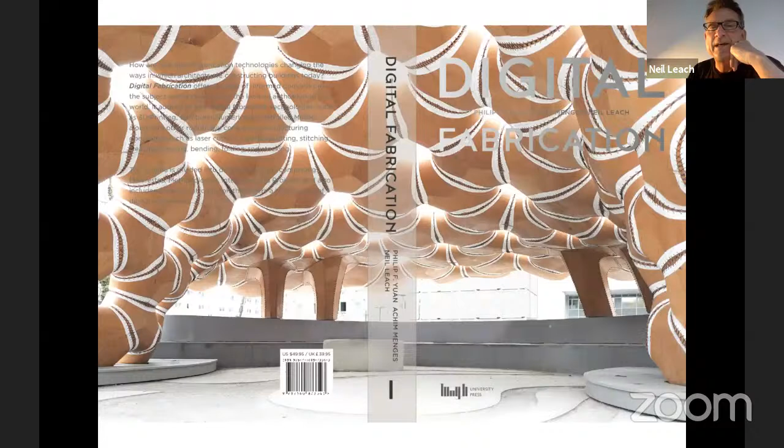Materials are analog, and you could argue that the whole way in which we put together buildings is that the digital remains a kind of a form of modeling. Buildings themselves are not digital, buildings are analog, but we use digital means to control the production of these things. And this is a comment by Neil Gershenfeld, where he kind of makes the point clear that what we're dealing with here is cutting, grinding, and so on, very much analog processes that are controlled by the digital. So the term CNC, computer numerically controlled, is really the term that is very useful to understand precisely what is going on.

So in terms of AI then, this is the work of AI Build. It's not as though AI is constructing it. AI is being used in this case to control the nozzle in the 3D printing process. So I guess we should have called that book maybe robotic fabrication rather than digital fabrication, or rather digitally controlled fabrication.

So I want to go back just to contextualize some of these ideas within history, and particularly to the publication Digital Tectonics, which I think is quite crucial in the context of today's debates. Back at the turn of the millennium, in 1999, I was teaching at Columbia in New York, where there was an interesting kind of debate going on between the very progressive computational guys like Karl Chu, Greg Lynn, and so on, and maybe the slightly more conservative historical figures such as Kenneth Frampton.

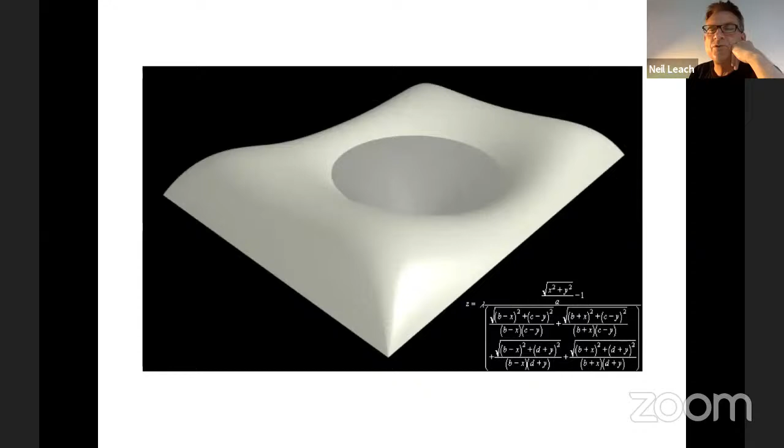And the second technique was, as it were, to massage this form on the computer using a technique called dynamic relaxation, which was pioneered by another colleague of ours at Bath at the time, Mike Barnes. So if you were to look at the ridges that appear in the mullions in this roof, when you apply this technique, it smooths them out. So you go from this to that.

So using these two techniques, they were able to create what effectively was a kind of lid that would literally sit on that roof without creating any lateral thrust. And you can see by the nature of these vertical stanchions that it was literally sitting like a lid.

Parallel to this particular project, there were other forms of research going on. This was a very early form of structural software called eifForm that unfortunately hasn't been marketed, but this was developed by Kristina Shea, who was teaching at the AA at the time, a lecturer at the University of Cambridge. She's since gone on to, I think, ETH Zurich. And this was a form of stochastic non-monotonic simulated annealing. Annealing is the process whereby you cool steel down in a controlled fashion so as to increase the strength.

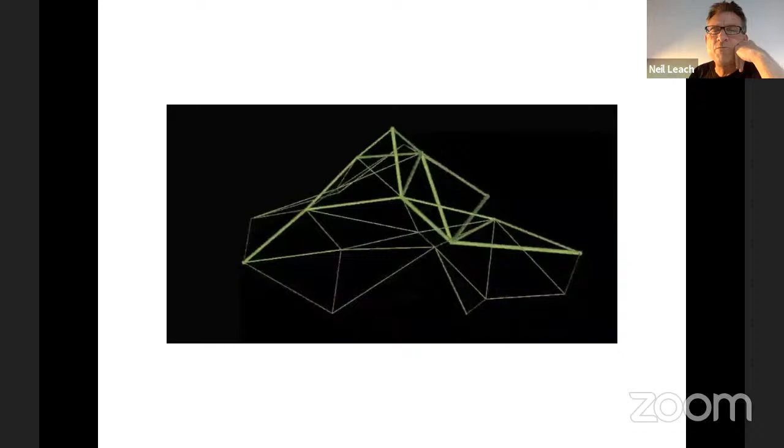And the stochastic non-monotonic side was about trying to open up. So each time a different version came out. These things would take about 20 minutes to run, and you'd have a range of different outcomes. You then would choose between your outcomes.

And this was the first built version of this, a collaboration, which I mentioned before, in Amsterdam, between myself, Špela Videčnik, Kristina Shea, and a few colleagues, where we built this for the first time. At the time it was revolutionary. I mean, this is what, 2002? Things have changed a lot since then, but this was pioneering work in many ways.

This is not really a session on philosophy as such, but the crucial figure in this particular conference was Manuel DeLanda, who has espoused this theory of what he calls new materialism. I like to think of it, and I'm not sure he would agree, in terms of rethinking Marx's famous dictum: up until now, philosophers interpreted the world, the point is to change it. In order to change that world, we have to understand the material conditions in which the world is operating.

And DeLanda famously produced a series of books. This was a hugely inspirational book for me personally, A Thousand Years of Nonlinear History, where he takes this approach and applies it to the way that cities are developed over time. A truly astonishing and revolutionary book, to my mind far more significant than Learning from Las Vegas.

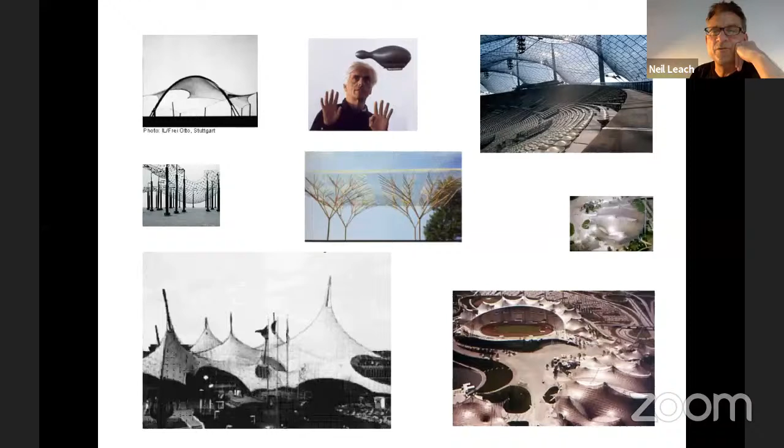And of course, these days we also have this kind of ethical imperative to be more efficient with our own buildings. Since Patrick is also here, maybe just mention briefly some of the research work that's been going on, which I think also fits very much within this particular way of thinking, and illustrates that there is a whole trajectory throughout architectural culture and architectural history that has been exploring the possibility of the intelligent use of materials, especially in structural forms such as this.

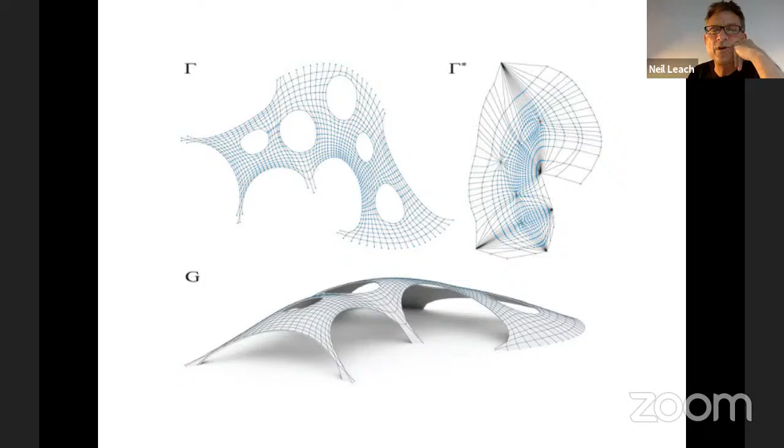And to my mind, at the time when I wrote this, there was nothing that one could do computationally to simulate the complexity of a simple soap bubble. And finally, we can now see another generation of this coming through in the work of Philippe Block with his RhinoVAULT, where he uses software to understand material behavior and avoid stress as much as possible to produce these extraordinary structures. This is from the Venice Biennale, where the ratio of the thickness of this vault is similar to that of an egg, extraordinary in its own way.

And then some 3D printed slabs that he has also worked on. This one is highly reminiscent of the kind of work that was coming out in Cambridge around 1450, King's College Chapel, the fan vaulting there, and so on.

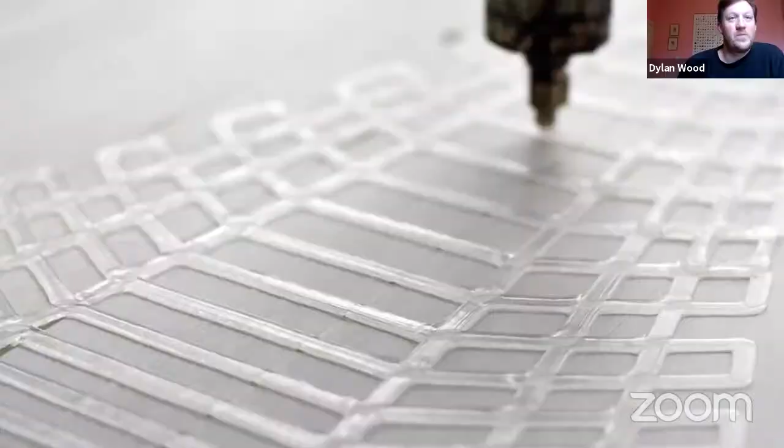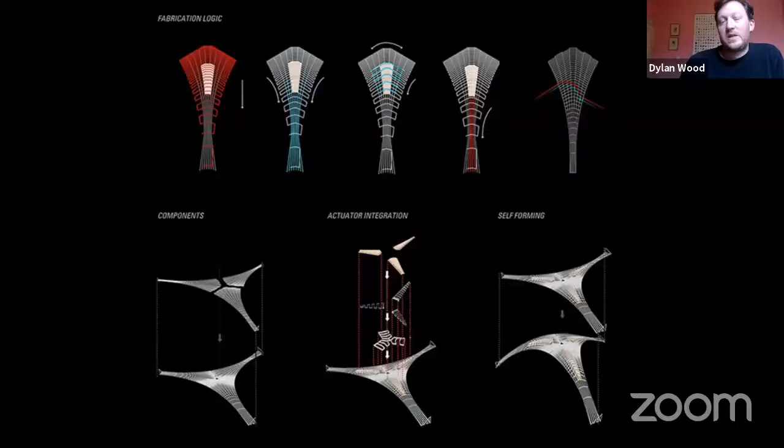So I just wanted to first say that it's really nice to be back in this context after Tiffany and I, already in 2018, did this workshop, which we also called Material Intelligence, at the Digital Futures conference, where we were looking at how we could program different levels of compliance into 3D printed structures. That was quite fun, and as always in Shanghai, motivating in terms of effort and spirit. And this work has also persisted and continues in our group even today.

Just one thing. There's a slight interference there. I don't know if there's any way of avoiding that. Okay, in the sound? In the sound. Okay, one moment. Maybe we can try switching the microphone. Does that help? Yes, much better. Okay. All right. Great.

So anyway, I think we're well placed in this sort of context of material intelligence. And well, we didn't name our group that actually in Stuttgart. It very much follows the same lineage of thinking. So what we did name the group that I lead is material programming. And so I think first today we want to give a very brief introduction of what we mean by material programming in terms of concept and how it relates to our work.

So I'll start by explaining basically where we are, not physically, but usually, let's say, in pre-COVID times. So I lead a small research team within the Institute of Computational Design, made up of myself, Tiffany, Laura, and Yazi, who will present later in the lecture today. And we are all PhD students at the Institute for Computational Design and Construction, which is led by Achim Menges at the University of Stuttgart in southern Germany.

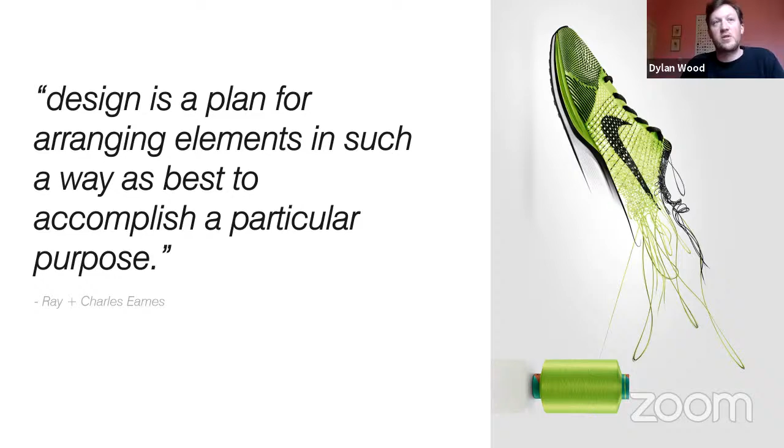And we also look at this through some of my other personal heroes, Ray and Charles Eames, who have a relatively simplistic look at design as a plan for arranging elements in such a way to best accomplish a particular purpose. But different from their 1950s, 60s, 70s view, we really are interested in how tools for design and also construction give new meaning to this statement.

So when we think about construction and innovation in construction, I think we usually frame it in this idea of a synthesis between the automation and the machine building, like an industrial robot, and more so the material. And this is something that I would argue we actually already see in many ways. In China, I'm sure that this is even more prevalent, but even in Middle America, it's now not uncommon that we have robotic factories that build buildings, especially with timber. So I would argue that the automation dominated by the industrial robot is actually already there.

And then there is a physical output, which is a combination of the robot moving and the material following it, usually by brute force. So this could describe a lot of the processes you mentioned earlier, Neil, that are more commonly known as CNC, so computer numerically controlled processes. And what's interesting is that these almost always use brute force. So it's a robot either subtracting material from something existing or bending it into a new shape, or in the best case, probably adding multiple smaller pieces of material to build something up.

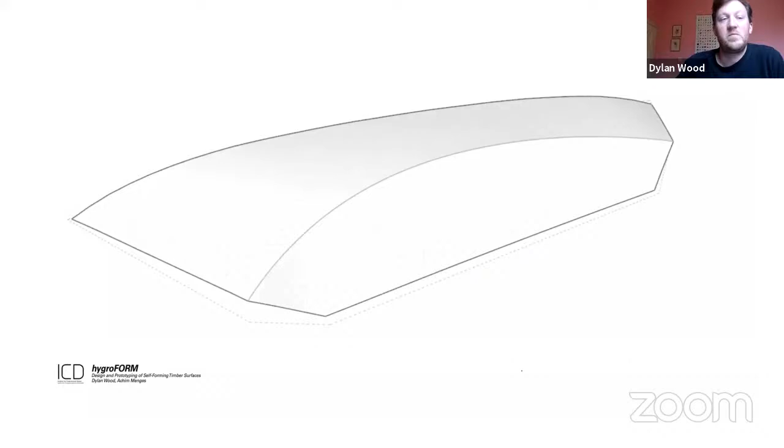And maybe the best example of this is from some of my very early work at the time when I finished my master's in Stuttgart, where we have here, for example, a sheet that is again curved crease folding in terms of geometry, but simply by programming the direction and the arrangement of the pieces of wood, by drying it out or changing the moisture in the piece, we can actually generate a physical shape without any brute external force applied.

And this concept of material programming and self-shaping in this case is something that we really do take from nature in many ways. So maybe the best example that Achim Menges would always use to explain this is with a spruce cone, which is representative of many types of plant cones on Earth that actually open up when they fall down from the tree and are cut from the supply of the living tree, and they perform a passive motion in their scales in order to release their seeds.

And this is something that's amazing geometrically and functionally, because the tiny scale of the pine cone, I mean, we have tons of them in our office and in our home offices. Every single one of these scales can perform this sort of sophisticated geometric motion without any energy or any motors or a computer. So we have millions and millions of pinecone scales that are operating incredibly reliably all over the world every year. And it's doing this simply based on the composition of the fibers inside of the scales.

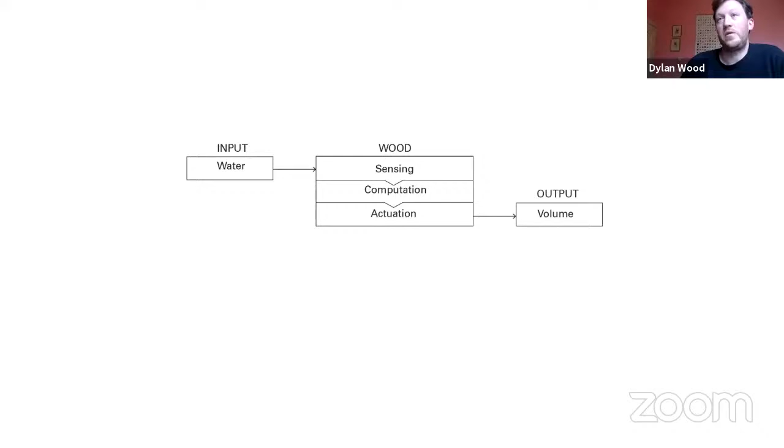The wood material itself has the ability to sense, compute, and actuate towards an output, which is a change in volume. And almost every type of wood has the ability to do this. But what's really amazing is that it can do it with such high swelling force and contraction force. And this really puts it on a different level compared to many of the synthetic smart materials that you might be familiar with as an architecture student or a mechanical engineer even.

And normally this is seen as a defect. So your table splitting apart if you leave it outside, or where I'm from in northern New England and also throughout the UK, with shingles that tend to crack or warp towards the sun as the exterior surface dries out and is then hit with water. And like the pine cone, this ability to change shape with the input of moisture happens in wood in the microfibrils of the cell walls. So it's an inherent natural property of the material, which we can actually never really take away.

And in industry, this is usually seen as a relatively negative thing, which causes pieces of wood, when we cut them, to do things like this at a large scale, like spring, bow, cup, twist. And this is all based on the way in which the wood is cut from its natural geometry. And what we said very early on, so this is from my master thesis, is how could we look at this not as a defect, but really as a feature that we could curate or program, first digitally and then physically, in order to create a desired change in shape, rather than these awkward moves.

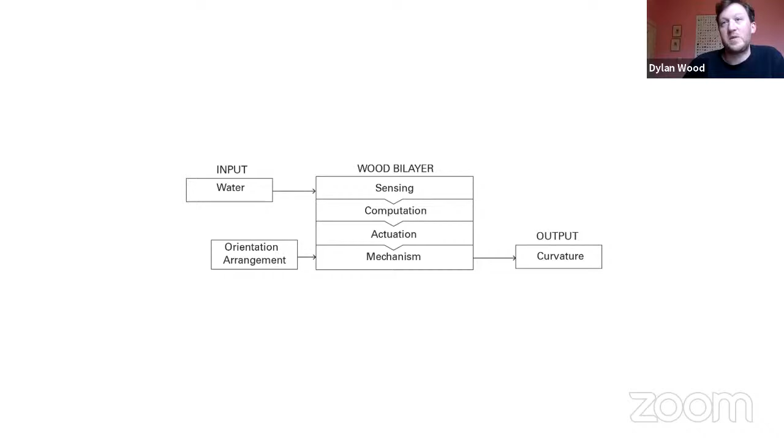So we add to our chart here with wood: if we look at something like a wood bilayer, which is just simply 2 layers of wood, and we add another really simple input parameter, which is the orientation and the arrangement of the pieces of wood within a larger mechanism, we can use the same programmable effects to generate not just volumetric change in shape, but curvature in specific directions. So this is what it looked like really early on as a master's student in Stuttgart with very little money.

I was able to purchase a piece of beech wood for, I don't know, 120 euros. We cut it up. We use our own software to figure out where these triangles should be oriented within the part. And then we put them back together into a part that has then specific orientations, starting with a specific moisture content. It looks really, really simple to begin with.

It's like a puzzle. We use CNC machining, but we could have also cut them by hand if we didn't have the machine. And what we get is this dramatic change in shape just by removing or adding moisture to the system.

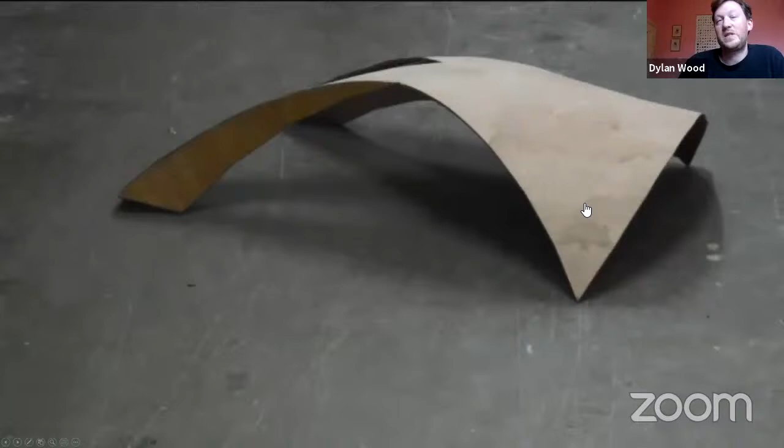So in the early prototypes, this movement is relatively awkward. So it's not necessarily always predictable, but what I find somehow amazing is that, while the in-between states might be kind of awkward, the end state is actually relatively reliable. And this happens without any machines, without any additional energy going into the system.

And if we start to imagine how a robot might shape something like this, even at the meter scale, I think we start to see the value and the simplicity of the approach. So that brings us to, I think, the major project from an architectural perspective that I want to share today. So this is called the Urbach Tower.

And this is a collaboration, as always, between ICD and ITK at the University of Stuttgart. And it was greatly aided by a scientific collaboration that we established with the Laboratory of Cellulose and Wood Materials at EMPA and ETH Zurich, as well as an industry partner with Blumer Lehmann from Switzerland.

So again, I think it's always so important to mention that these are relatively large teams that execute these projects. It's no longer the sort of starchitect alone. And these teams are also relatively diverse. So they include nearly traditional craftsmen and engineers, as well as material scientists, which is something that I think we have developed in the University of Stuttgart as a sort of now relatively normal way of working, but internationally, I would say is still pretty unique.

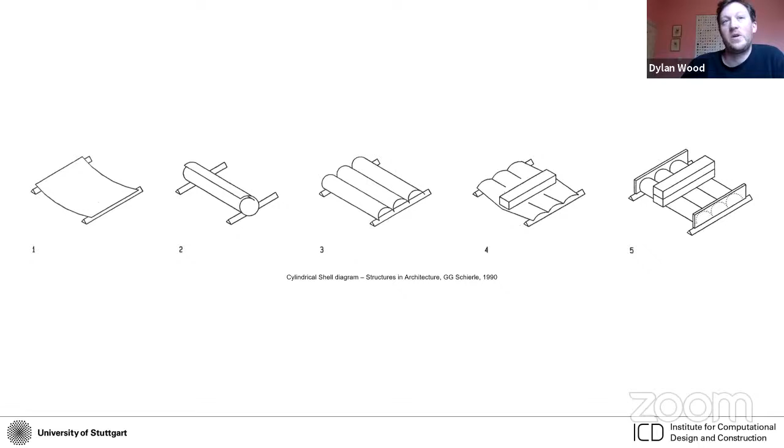But the way in which we make these curved surfaces has developed a lot differently from the way in which we design with them. So, well, designing a BIM model that can go straight to production digitally is maybe no longer nearly as complex or as expensive as it would have been 10 or 15 years ago. The way in which we produce the material has not necessarily advanced so much.

So even though we have these automated systems to bend wood into 3D shapes, the cost of production is nearly double for a curved beam of that of a straight beam. And as we get into more complicated surfaces and twisted types of geometries, this relationship goes up exponentially. And in the end, this means that we simply don't use curved pieces of wood as geometry in architecture nearly as much as we could.

And so if we go back to our self-shaping wood, which I shared earlier, the question here was how we could turn this into an industry-adapted process in which we could shape the pieces of wood hygroscopically during the pre-fabrication and use this to, in this case, produce larger sheets that have a relatively high curvature, but remain slender in thickness. So the key to this computationally is actually in the mechanics.

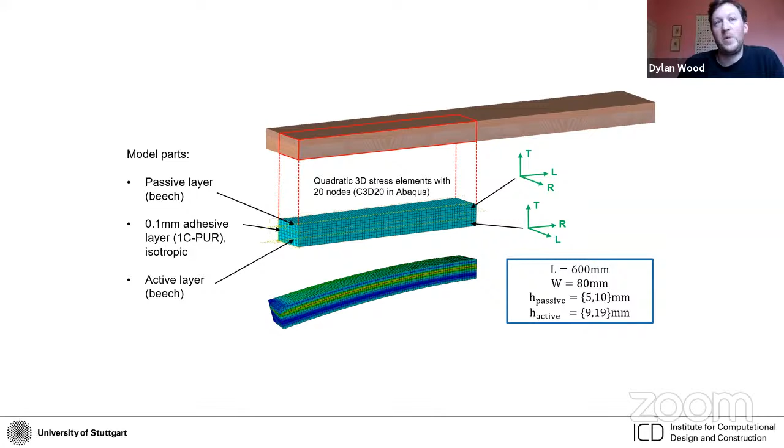So this is not something necessarily that we do, but our partners at ETH and EMPA are experts in understanding what type of input parameters we need in terms of orientation, thickness, and moisture content in order to produce reliable changes in shape in an industry-adapted process.

So to put this very shortly, I mean, you can read some of our scientific publications about this if you want to know more detail, but we need a mechanics model. We need also a materials model. And then we need a way in which computationally to define all of the parameters as we move into more complicated geometries.

In the end, this means that we get a certain model that allows us to be able to predict the movement relatively accurately, enough so that we can go into producing high curvature pieces for architecture.

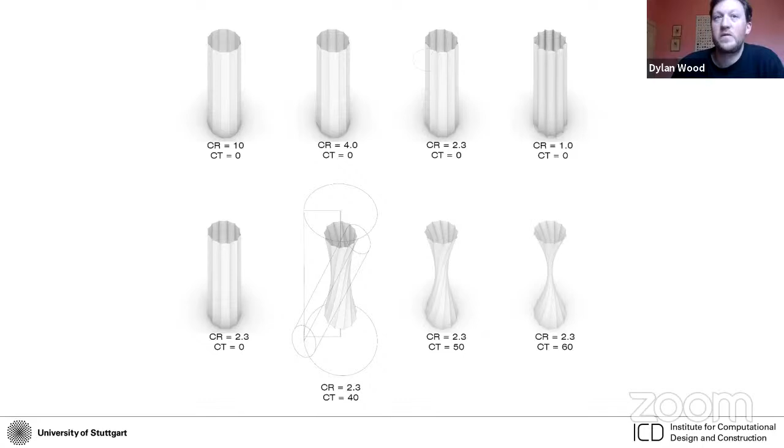And on the bottom is this sort of architectural overlay of this, looking at how we can create a double curved overall geometry, still using single curved cylinders. So geometrically, almost everyone would tell you that the tower is double curved. That's not true. It's made from a set of single curved cylinders that are intersected at an angle.

So in terms of a parametric model, there are actually only two parameters in this overall geometric model. It's relatively simple, and I would challenge anyone to try to be able to build it within a couple of hours in Rhino or Grasshopper. As a constructional system, it's a little bit more sophisticated.

So of course, once you have curved pieces and you're able to produce them, the most difficult thing becomes how can you connect them without needing a lot of steel. So here we have a sort of variable model of screws, which we can use that then become hidden between the 12 different components and are almost completely invisible from the inside of the tower.

And that relies on the fact that our partners from ITKE can not only model the behavior of the CLT down to the different layers and panels, but also look at almost every single screw throughout the connection details that are all at variable angles again, and that they can not just model this, but they're able to iterate through multiple design options relatively quickly to find a solution that works for everyone.

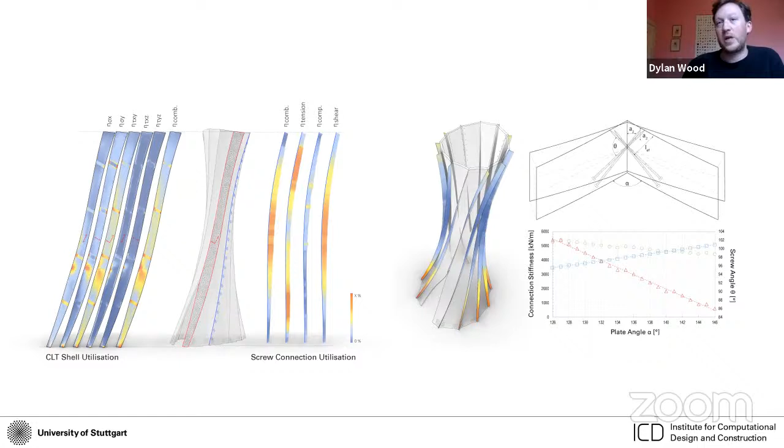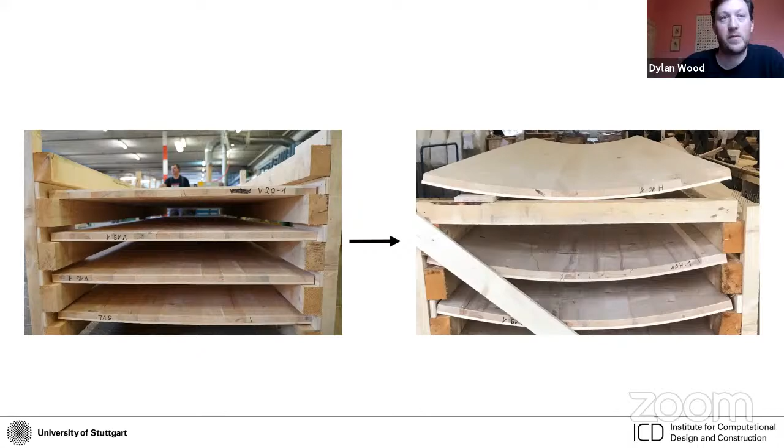So then the panels get taken to a different hall and turned into these blanks from which the larger CLT components for the tower are cut. This involves basically gluing them together in multiple layers and sort of overlapping them or arraying them to form larger sheets.

And these in the end are the finished components. We still do have to use a CNC machine to trim them and put in the tiny edge details, but you can imagine this process kind of like going to a dentist, that you want the CNC machine to do the least amount of drilling and carving as you possibly can.

So in the end, I think each piece required only 90 minutes of machining, which is relatively small for a 14-meter long piece. Then these get put together into assembly groups, and a facade is added from larch wood. And then they're assembled on the site, in this case, in just 8 hours by a team of 4 workers, compared to the construction of the foundation, which took almost 2.5 weeks.

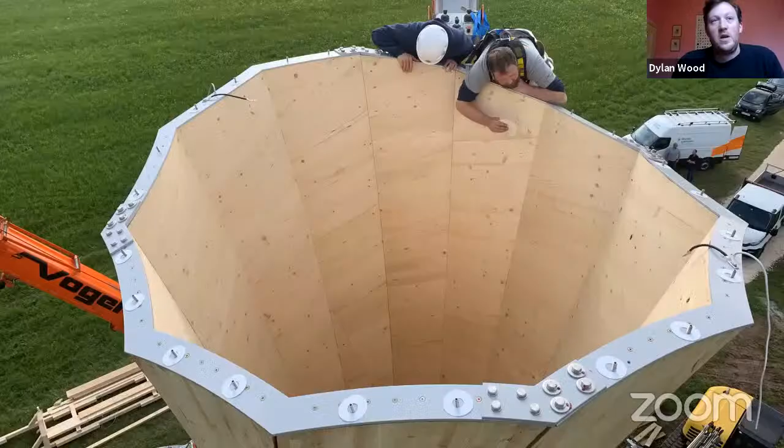The structure is almost entirely wood. We have this very thin 12mm steel ring at the top, which forms an interface between the structure and the roof, and also provides a sort of grounding for the lightning protection system. And then this is topped off with a transparent roof. We haven't yet started working with transparent wood, but I think there are some companies in France that we would really like to partner with on making that also out of wood.

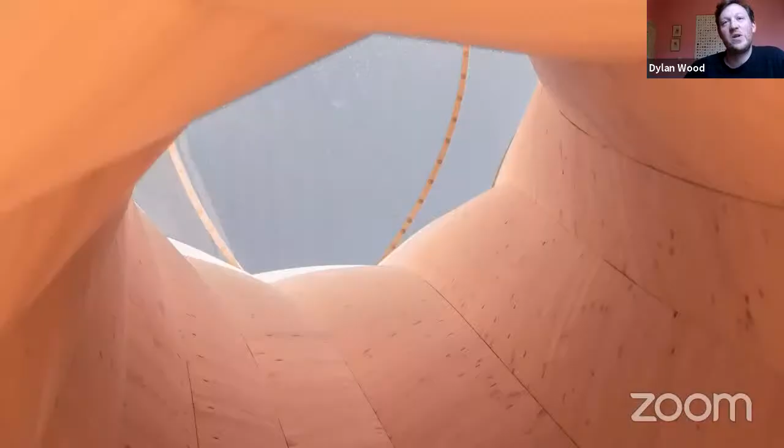So architecturally, why we're so interested in this is because we also think that it shows a sort of new light on how we can use more sustainable materials. So while wood we've worked with for many, many years, this is a type of geometry that we get with these really sharp curves on the inside and almost pillow-like surfaces on the interior. That is something that's very different in terms of architectural expression.

At the same time, it's really, really performative structurally because the whole tower is made from just 90mm thick CLT, even though it cantilevers from the ground without any steel in the actual structure. It's also really nice that the structure remains friendly. So without any paint or any treatment, this can be basically touched by anyone, even a child. So it's a bit different from some of our carbon fiber structures. And it retains this kind of natural beauty, which also alludes to its performance.

So the tower sort of continues to live in this natural setting. We have to keep monitoring it. So this is always really important to note that these experiments continue long beyond our sort of quick introduction of them as a research pavilion or as a demonstrator building. So the moisture content in the wood continues to change every day as it's exposed. And this is something that we monitor for the next 2 or 3 years and compare to 3D scans of the building to understand how it might change shape over time globally.

And while this is how we sort of imagine the structure in this beautiful landscape, I think we also can't necessarily ignore how it's perceived in the public. So from everything from comparing it to something that Bernie Sanders would not want to pay for, to Bill Baker visiting, to children sort of climbing on it, I think it's very interesting to see how these things live as well in culture.

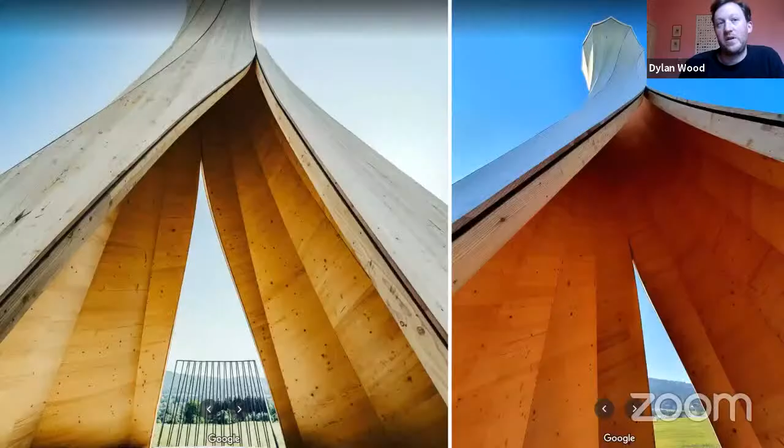So then just very briefly, I want to introduce the new project that we have, which is about furniture that we will be releasing relatively soon. And I think, well, the tower uses self-shaping as a sort of pre-manufacturing step, which is maybe hidden or completely removed from the kind of later life of the building in which it's supposed to remain a static object. Developing a furniture system was really exciting to us because it gave us the chance to look at how this could become an active part of both the assembly process and how we sort of critique and how we live with our furniture.

So the idea is relatively simple, that this represents a sort of extreme flat pack configuration where pieces are produced in a flat configuration in the factory and tuned to the specific geometry that you order. And then once you're inside your house, you open them up, and over a couple of days, they shape into this geometry. And this shaping continues to happen at a relatively slow rate back and forth over the lifespan that you own the furniture piece.

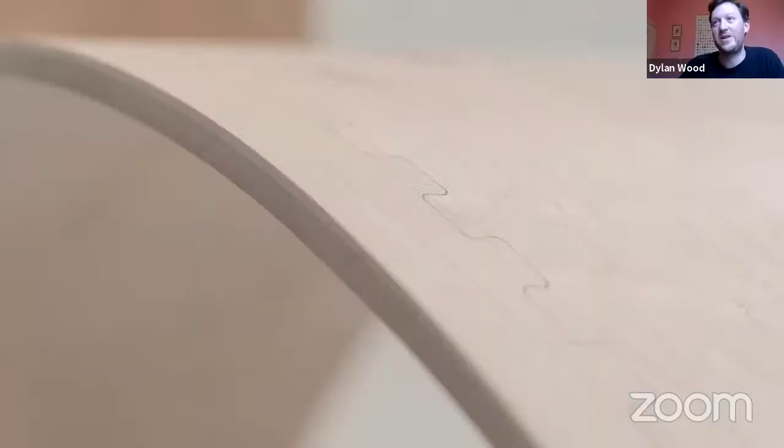And then just very shortly, I can share some of our more recent work with students, which looks at how we can see material programming from a slightly different light, where we can consider how smaller machines can be used to activate material behaviors, and really look still at this relationship, not just from the robot operating on the material, but the material as well pushing back.

Thank you, Dylan. Thank you. That was wonderful. All right, so should I just share my screen? Yes, Dylan, you have to unshare yours. Yeah. Okay. Okay. All right.

So I will continue where Dylan stopped. So in his presentation, we saw how the cellular mesostructure of the wood works together with the hygroscopic property of the cellulose fiber to create this self-shaping and shape changing, from pine cones to the Urbach Tower. Using thinner pieces of wood, we can create wood bilayer structures that react to the relative humidity level in the environment and move continuously in a cyclic motion.

This is the research that my colleagues started at ICD more than 10 years ago as a way to look at how we can create shape adaptation in buildings, specifically building facades, so that we can create environmentally responsive kinetic systems that react and work with their surrounding environment. And a very nice implementation of that we could see in the Hygroskin pavilion, which was built in Stuttgart.

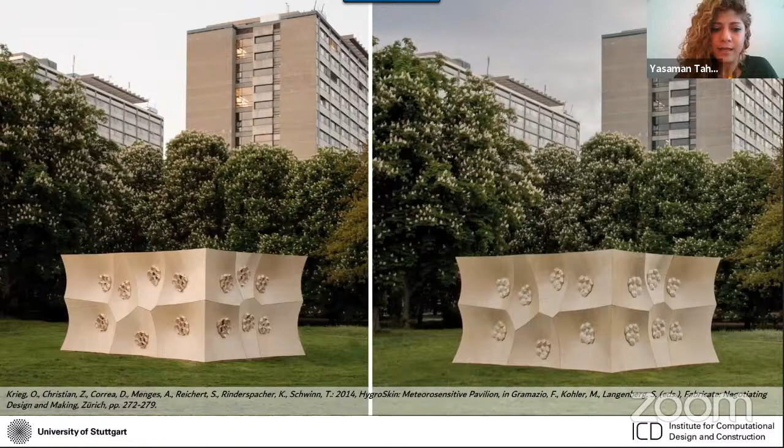So using wood, they were able to build these structures, and also, as Dylan showed, it's super efficient and effective in a larger scale architectural system, but it comes with some constraints. For example, we know that the wood expands and shrinks perpendicularly to its growth lines. So this means that if we want to reach a specific bending curvature, we need to find a piece of wood that has that built-in fibrous mesostructure. This gets more and more complicated if we want to create more complex geometries or more complex mechanisms.

So this brought us to the question: what if we could computationally design and digitally fabricate this internal mesostructure, which in turn defines the shape change in the pieces, defines the bending direction, bending orientation, the timing, etc. And this took us to 3D printing.

So with 3D printing, we can construct a part layer by layer, line by line. So we can literally create something like the wood's mesostructure now by defining the direction and the orientation of the fibers, which allows us to literally program the movement and the shape change in the parts.

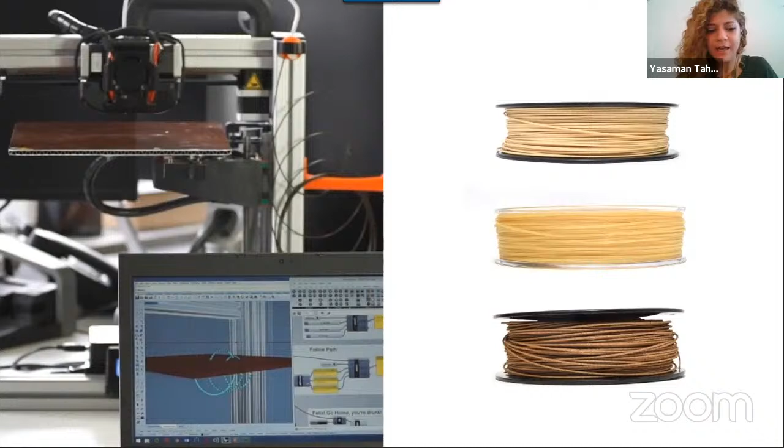So in our method, we use FDM 3D printing, which is the most standard desktop 3D printing technology. And for this, the material needs to be in form of thermoplastic filaments. But the key here is that they don't need to be pure plastics. They can have some fillers in them. And these fillers are the things that bring hygroscopicity to our material.

So in one of our projects, we partnered with another institute at the University of Stuttgart, Institute for Plastics Technology. And they produced hygromorphic filaments for us. They took a matrix of bio-based plastics, and they added cellulose as a filler. And cellulose is the agent that makes these filaments into smart filaments or hygromorphic filaments. And using these, we're now able to 3D print our structures.

We usually use two types of filaments. One, the cellulose filled or wood filled filaments that work as the active layers or the active agents. These are the layers that expand and shrink. And we combine these with other types of material, such as normal PLA or flexible material, to create shape-changing structures.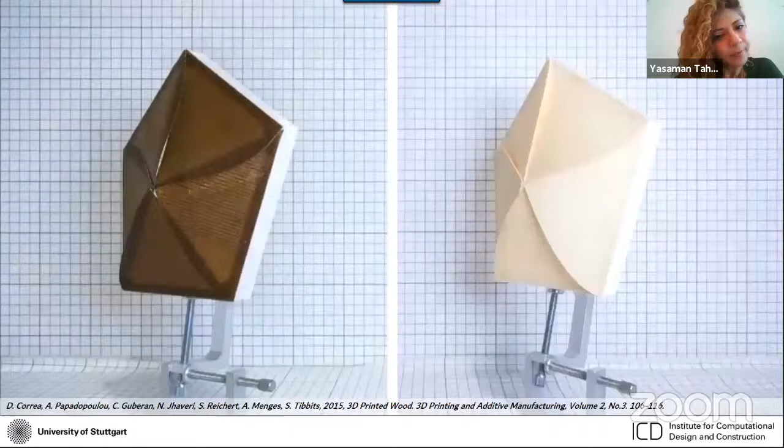So in the first step, the colleagues before me who were working at the institute replicated the exact same apertures that you saw in the HygroSkin Pavilion. This was to benchmark and see if the 3D printed structures behave similarly to the wooden structures and if they react to the changes in the relative humidity level.

But then after that, things can get more and more exciting, and we can go and create more complex structures. Now that we can 3D print things, we can design and we can program the material with the type of shape change that we wanted to achieve. For example, here you see how different modules with the same outline are bending in different directions. And this is only defined through the arrangement of the 3D printing toolpaths.

The key point here is that now that we have this digital design and digital fabrication workflow, we can take advantage of different computational design tools that allow us to design shapes, not as solid objects, but shapes in transition. We can build our own simple shape prediction tool so that we can design parts before and after transformation. For example, this elephant that is designed in Rhino and Grasshopper, and then 3D printed.

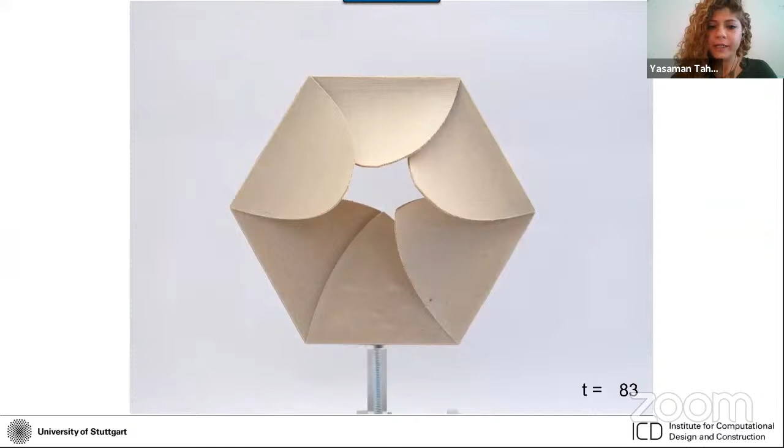For example, here you can see that in this simple aperture design, each of the flaps are programmed to move in different time steps. And this is how we can create the overlaps in the structure and make sure that the parts don't collide with each other.

And similarly, with the exact same geometry, it's just different assignment of parameters in different flaps of the aperture that creates an absolutely different arrangement. Here we have two sets of layers. In one layer, the flaps open first, faster, quicker. In the other layer, they open with some delay.

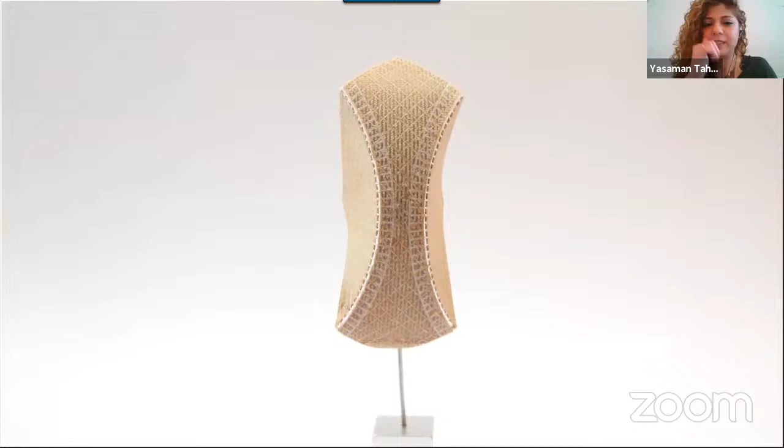And lastly, the other advantage of 3D printing is that we can combine different materials with different properties, and putting that together with our ability to program the shape change, we can create more and more complex shape-changing structures. And the type of structures that I'm going to focus on a bit more for the rest of my talk are the self-shaping curved folding structures.

So here we use three types of material. One of them is TPU filaments, which are flexible filaments, and we use them to create hinges and fold lines in our structure. And then we took the geometry of curved crease folding, which combines bending in the surfaces and folding on the curved crease lines to create these beautiful and also functional and efficient structures.

So on the geometric side of curved folding, a crease undergoes a fold when the two faces on the two sides of it bend in the opposite convex and concave directions. So in our self-shaping structures, the bending in the faces is induced through this hygroscopic bending motion that we generate with the cellulose filled materials. And as the two faces on the sides of the crease line bend, this makes the crease line fold.

In this image, you can see these layered 3D printed structures of self-shaping curve folding structures. As you see, there are many layers with three different types of materials, and each of the layers have their own specific function: the active layer, which expands and shrinks; restrictive layers, which turn the expansion and shrinkage of the active layer into bending; the bonding layers; and the hinge layer. And all of this is possible because we can easily design them and 3D print them using a normal FDM printer.

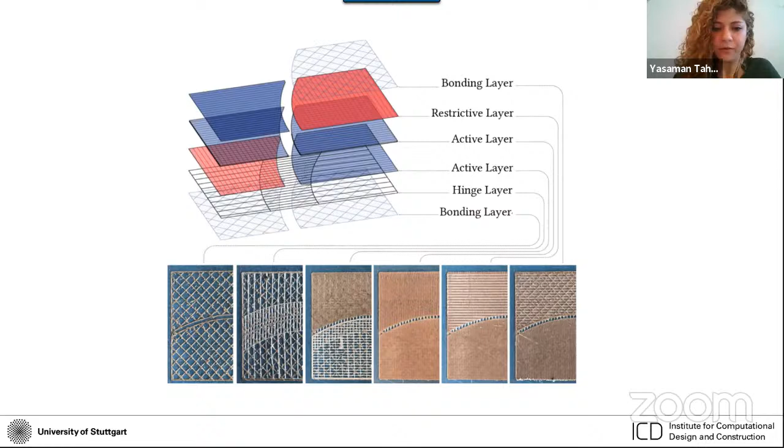The interesting thing is that now that we create this specific type of geometry, or self-shaping curve folding, we can surpass some of the limitations that are inherent to the material. For example, here you see two modules, one of them with curve folding and one of them with simple bending. They're the exact same materials, exact same parameters. With the simple structure, which only bends, we can get maximum around 27% of opening. And when we use curve folding, we can reach up to 70% of opening.

This is very important when we think of these structures in the context of architectural application. For example, a kinetic facade, what we expect from it is to provide us the largest margin between open and closed state.

Another great thing about this workflow that combines computational design and 3D printing is that by slightly adjusting some parameters, we can program how the overall shape change in the structure happens. And in the curve folding structures, we can easily see that, and we can really take advantage of that to control the maximum folding angle in the folded structures.

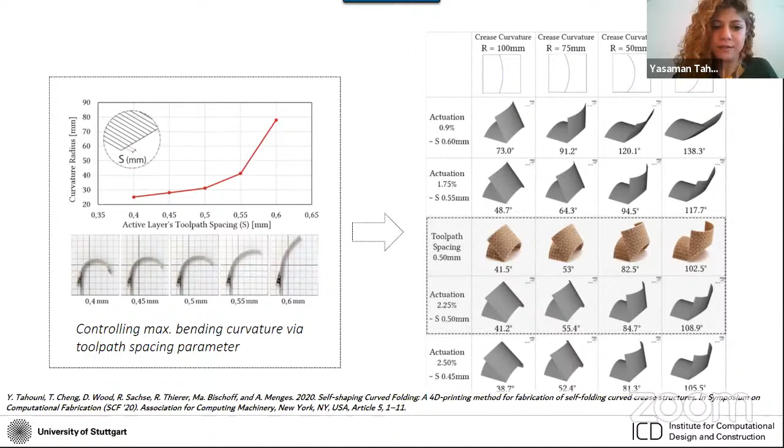And now by using these tools for shape programming, we can create structures, for example, as you see here, a modular facade system with 20-something different modules. Each of them have their own unique geometry, but through controlling the parameters, we can reach the same folding angle in all the different modules.

Okay, so now I want to show you a quick preview of our computational fabrication workflow. What I'm going to show you is for curve crease folding, but this is pretty much the same or similar workflow that we use in different projects. It starts with inputting some geometry in 2D, goes to the mesostructure setup, which is basically the material programming process. Then goes to 3D shape prediction, and if the simulated shape is what we are happy with, we can generate the toolpath and then export the G-code and use it for 3D printing.

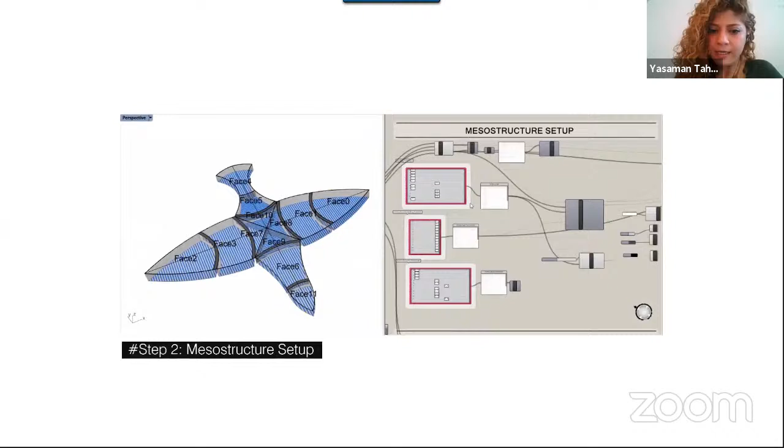So this is the first step here in the case study of curve folding: inputting some faces and then defining their bending direction and the bending orientation. The next step is generating a mesh and then using our geometric shape prediction tool to see what would be the result of the mesostructure setup that we defined in the previous step. If some of the fold angles, deformations, or transformations are not desirable, we can go back to the previous step and adjust the mesostructure setup.

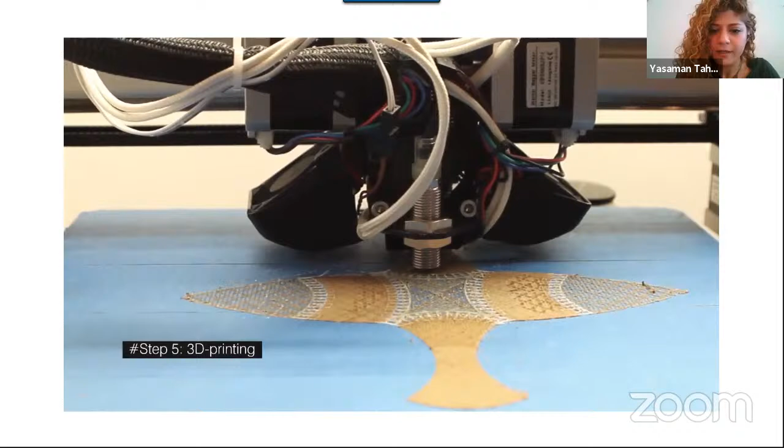After we make sure that the shape is desired, we can go and generate the toolpaths. The toolpaths are generated for different materials and different layers separately, and then they all come together and the G-code is generated, which is then used in a normal desktop 3D printer for printing the part. After the part is printed, it's time for its actuation. With this specific material, we put the objects for half an hour in the water, and upon drying, they self-form into their final shape. Here, the curve folding bird.

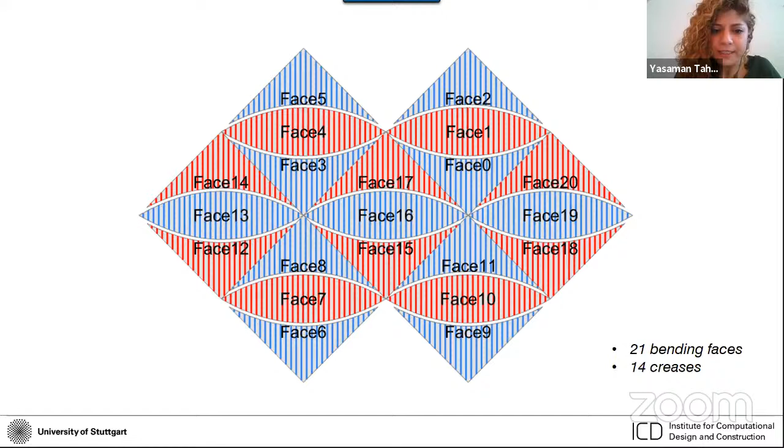All right, so now that we have this overall workflow, there's basically no limit to the level of complexity and resolution that we can achieve. This takes us to some of our studies on curve folding tessellations. For example, what you see here is a crease pattern that consists of 21 faces and 14 crease lines. We designed this using our computational workflow and fabricated it. Here you see how it self-shapes from the flat state, where it was printed, to this final folded structure. The material does this all on its own.

And I think here we can just take a look from some distance and see that if we want to fold that structure by hand or by robot, it would be extremely difficult. By hand, it would require a high level of mastery. And if we want to use systems such as robot fold, which is super successful for a limited number of folds in a structure, can we really have 20 robots if we want to simultaneously fold 20 creases at the same time?

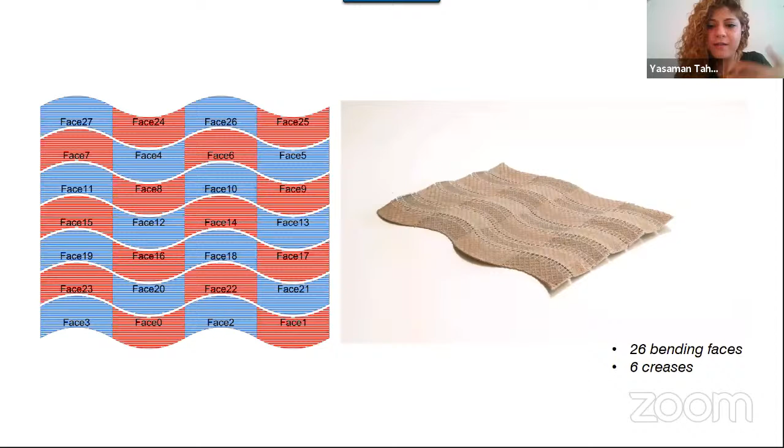So this I think is reaching the point that shows that the method that we do, the way that we embed the self-shaping process into the material itself, is like embedding a bunch of robots in the material, and this whole coordinated motion between different parts, different faces, results in a structure that self-folds without requiring any external forces or any assembly efforts.

And these structures, because they are corrugated structures, because they're based on origami tessellations, are structurally performative after folding. For example, the structure on the left-hand side, with a thickness of 1 millimeter and a self-weight of 8 grams, can take a load of 620 grams after it self-shapes into this corrugated structure. And the same goes for the right-hand side, where the 1 millimeter structure with 12 grams of self-weight can take up to 300 grams of load.

And so this is for us just the beginning of one of the paths of research that we are continuing at the Institute: how we can use these structures in potentially larger scale architectural applications. One potential would be to use them in sandwich panels and use these structures as a space filler. Another option would be to actually produce them at a much larger scale. And these are the things that will come up in the near future.

So just to recap our overall methodology, we have a co-design between material, mesostructure, and the shape-changing mechanisms. Material is the thing that enables this self-shaping and shape-changing process from the beginning. We customize our materials, we engineer and design our materials together with the application that we have in mind. And since hygroscopicity is our main aim in the context of architectural application, this is how we approached the materials.

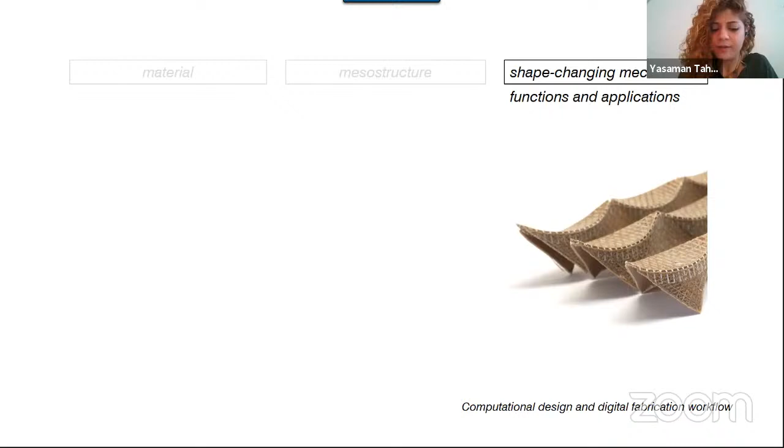Next is the mesostructure. This is what we computationally design and digitally fabricate, and this is where we really control the structuring of the parts, which defines its overall shape change. And lastly, there are shape-changing mechanisms, which are the applications of simple bending bilayers of the shape-changing elements that come together to create functions and architectural applications for us. And when we put the 3 of them together, we can do awesome things.

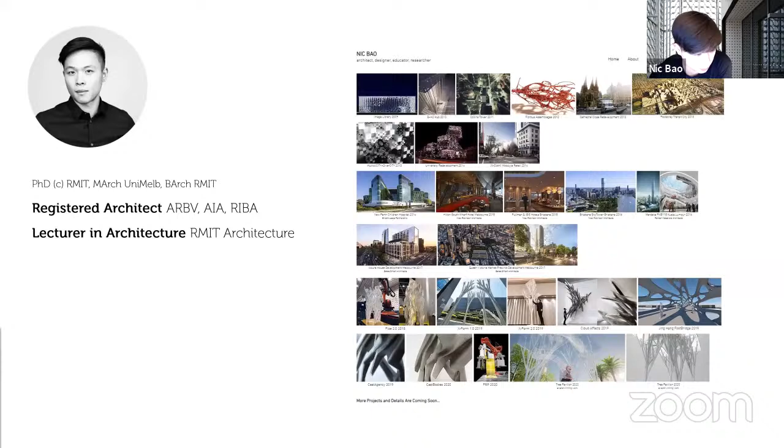So the topic is called Forming Complexity. It is also the name of my architecture design studio at RMIT Architecture, and I also work with Professor Mike Xie and Roland Snooks in their labs as well. Their lab is called the Center for Innovative Structure and Material at the School of Engineering, and Roland Snooks' new lab is called Tectonic Formation Lab at RMIT Architecture. So I'll just quickly introduce myself. I'm a registered architect, currently a lecturer in architecture at RMIT, focusing on the architecture technology stream.

So today I would like to talk about performance-driven digital architecture design and intelligent construction. The background, motivation and problems of my research come from three aspects: the inspiration by the laws of nature, the collaboration between architects and engineers, and the lost connection between architectural aesthetics and structural performance. So my research is mainly about algorithms for functional intricate form and mass customization manufacturing strategies for the construction industry.

So let's start from some precedents like the Gothic buildings and Gaudí's church, and nowadays the smart slab by ETH and the fiber pavilion by ICD. You can find the similarity: the forms are all inspired by nature, especially by natural structures, and they balance aesthetics and structural performance. So how can we make form from nature, and how can a computer generate natural forms rationally?

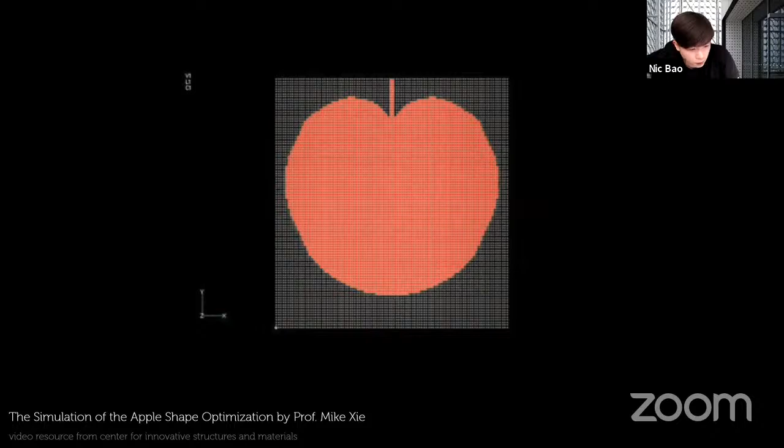So in the 1990s, Professor Mike Xie proposed a simulation of shape optimization, which is called the BESO method. It's a bidirectional evolutionary structural optimization.

And this is a structure design project by myself and the team, and it has won the first prize in structure optimization and additive manufacturing in China. You can see the material is being removed step by step while keeping similar structural performance. And now this topology optimization method has been tested and applied on several architecture projects.

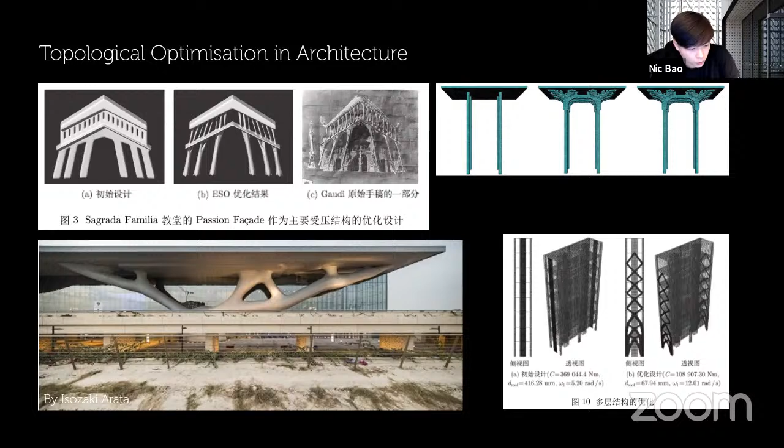Professor Mike Xie's team also developed the BESO method into a Rhino Grasshopper plugin called Ameba. It has also been selected as the most influential digital tool of the year at the Digital Futures Conference in 2020. So now I want to talk about some architecture applications of this method in my research.

So we collaborate with the Architecture Robotic Lab, which uses KUKA robots to develop large-scale 3D printing intelligent construction techniques, and use additive manufacturing, including clay and concrete printing, mainly polymer printing, and wire metal printing.

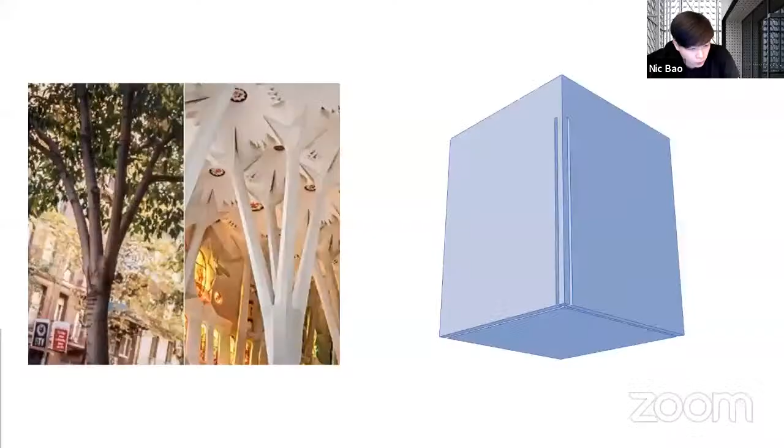So the first project I was talking about is XForm 1.0. This one is from 2019, and we built this project at Tongji University at the Digital Futures Conference. On the left side of the image you can see the tree branch and Gaudí's tree-branch-like columns. So we applied the loading on the box shape, then fixed the bottom parts and applied the BESO algorithm, then generated a similar-looking structure.

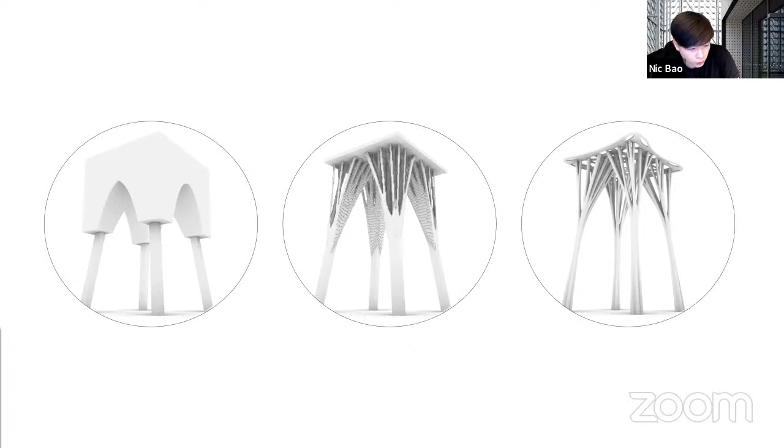So you can see here the top roof structure is quite similar to Gaudí's church, and we also created more branches for the column system. The original design is on the left side. Then we run the optimization, creating the tree branches. Then we smooth it. Later we print a small-scale 1 to 10 model to test that it can be printed.

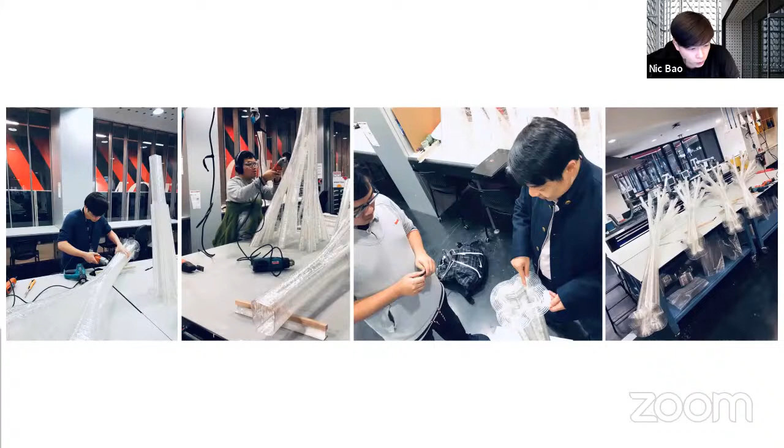And later we just do some post-production of the columns and deliver these 4 columns from Melbourne to Shanghai. And for the construction method, we work with our Digital Futures workshop students to assemble it. We used just a few hours to assemble the whole structure. You can see it's about 2.2 meters high and 1.8 wide. So it was very successfully built.

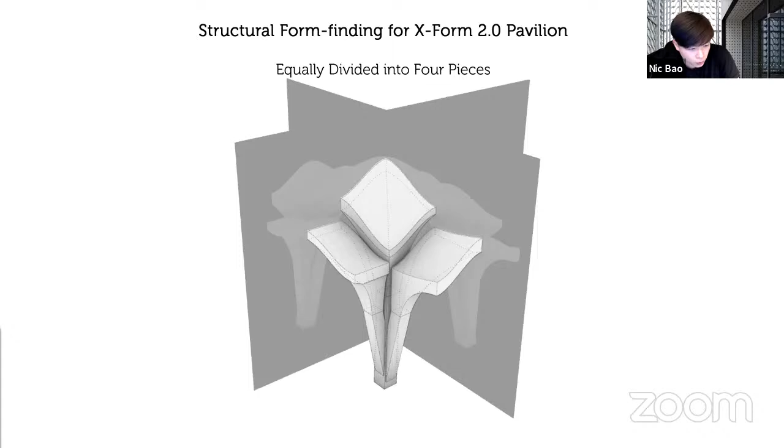So the next project is XForm 2.0. This one is a more advanced pavilion of the topology optimization method. So this is the main design domain of the pavilion. Then we equally divide it into 4 pieces because it's symmetrical. So it's quite similar to XForm 1.0. The different thing is this pavilion has different heights and more pieces at the top.

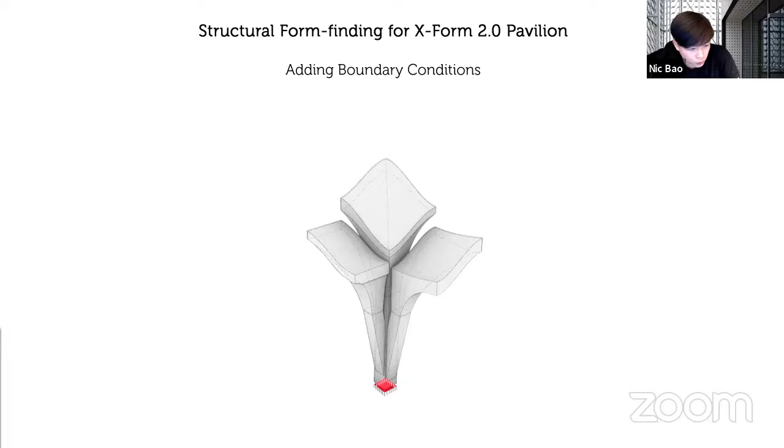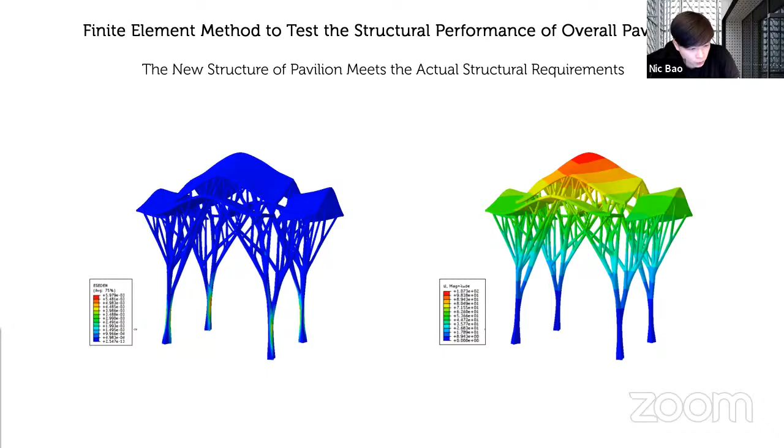So what's the difference between the 2 pavilions? XForm 1.0 just has one flat top and also fewer branches. But 2.0 has 3 different heights of the top and creates more branches. You can see the difference: it's more innovative and more complex. So this is the different look of the body of the column.

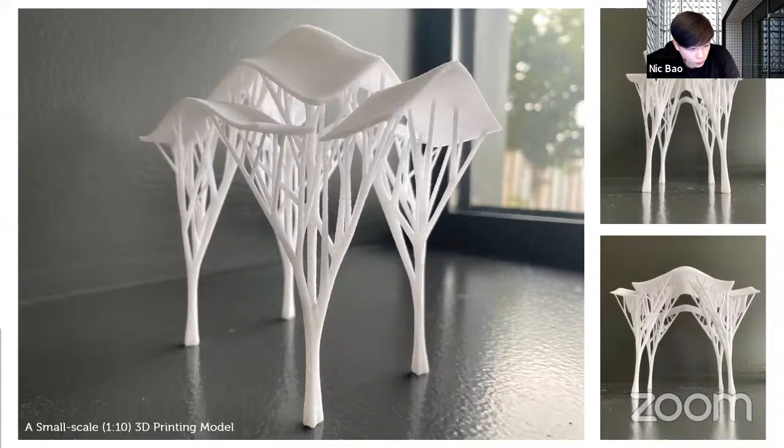So we also print a small-scale model. Then we divide it, and it's quite successful. We divide it into 20 pieces, use the robot to print the different pieces, and deliver it from Melbourne to Barcelona to attend the conference. Because we brought it ourselves, we only brought a quarter of the model and assembled it at the conference site.

So it's just 2 people with one 3D printer. Then we assemble it on site. It's just using some screws.

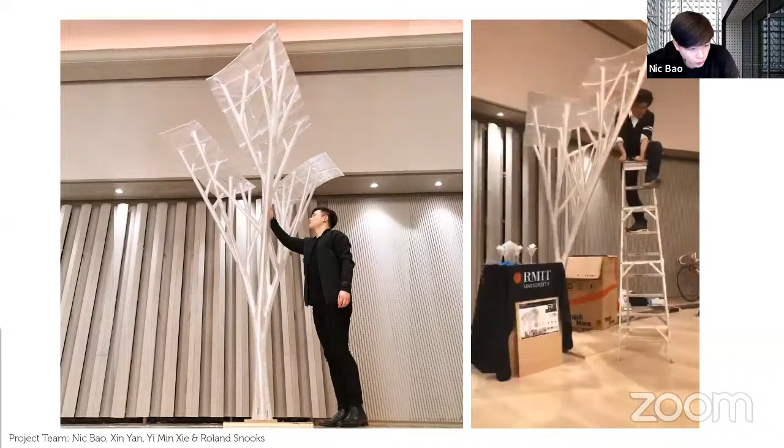So this project is a large project in the tectonic formation lab. It's called Cloud Affects. The design method of this project is not topology optimization, but my contribution in this carbon fiber infused 3D printed tectonic project is the real-time structural feedback. We published a paper at the Digital Futures conference last year.

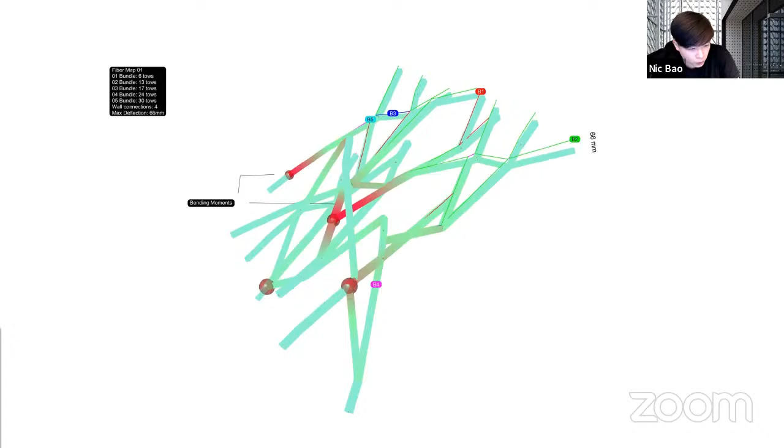I used Grasshopper to create the real-time structural feedback loop to run the structural analysis at the same time, so we can fix and improve the design to match the best performance. This is the video showing the project, and this Cloud Affects project was exhibited at the Shenzhen Biennale in 2019.

It also used the same machine to print the plastic formwork, then cast the carbon fiber in the middle. You can see the black thing is the carbon fiber structure. This is the exhibition in Shenzhen, and it's a large team led by Roland Snooks. The main researcher on this project is Hassan Mohammed, and we are all team members on the project. It's quite a large installation.

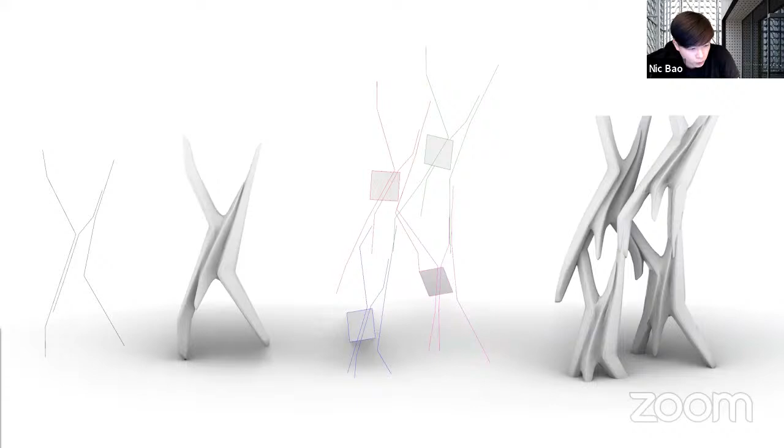And this project is called Cast Bodies. Cast Bodies is also my own research project. It uses agent bodies that interact together to create a structure. Then we use the same method to print the plastic formwork, but this time we use the plastic formwork as sacrificial formwork. Then we cast the high performance concrete into the formwork. This is the final result. Later we can remove the formwork and keep the concrete structure as the complex form.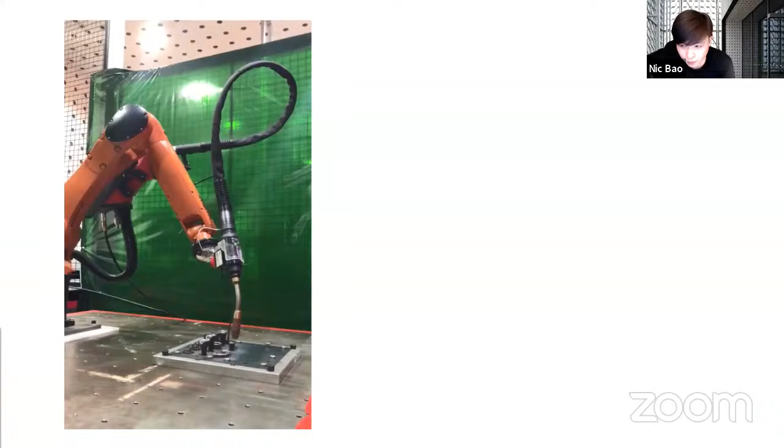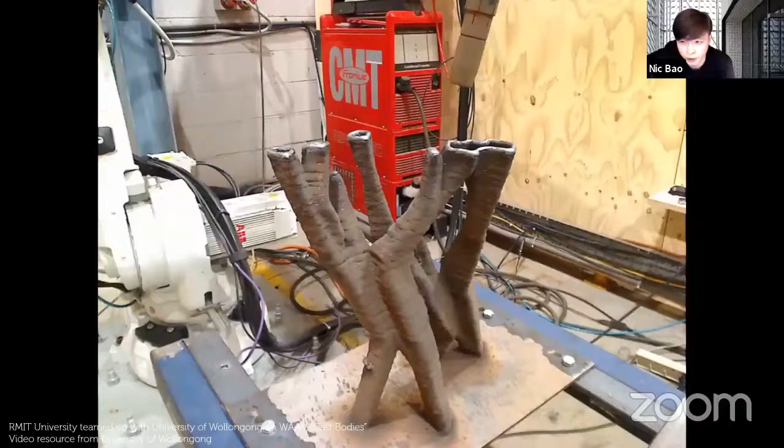Then we moved on to robotic wire metal printing to realize the same geometries. Because of the lockdown last year, we collaborated with Wollongong University to test this Cast Bodies project, which was quite successful, and currently RMIT Architecture has already developed the printing system for future projects.

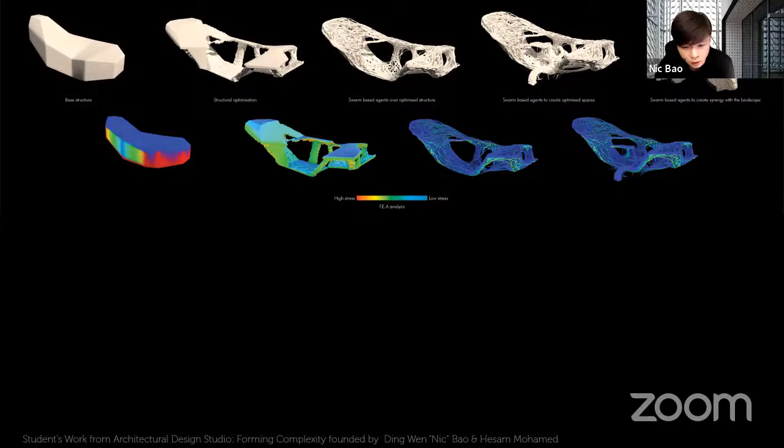Also, talking about the topology optimization methods used in my teaching results. In teaching, I run different workshops and studios to test the same methods for design. This is student work from the RMIT Architecture Design Studio. Students are using Ameba to do structural optimization, then run the swarm-based agents on the overall structure, then create a pavilion within the landscape and test the structures. Then we use plastic formwork and concrete to do the fabrication.

And this is another group of students who designed an intricate wall system using the topology optimization method. Now I'm going to show you our Digital Futures workshop in 2019 and the Ameba video. You can take a look at the workflow of the BESO algorithm and Ameba.

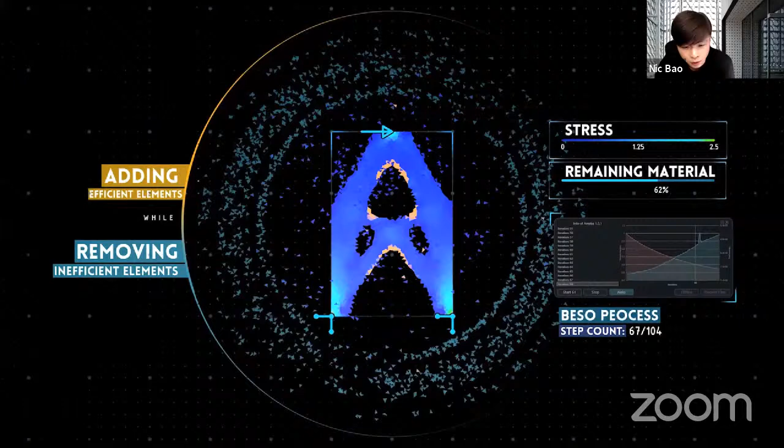Actually, Nick, can you possibly shut the music off? Yeah, thanks.

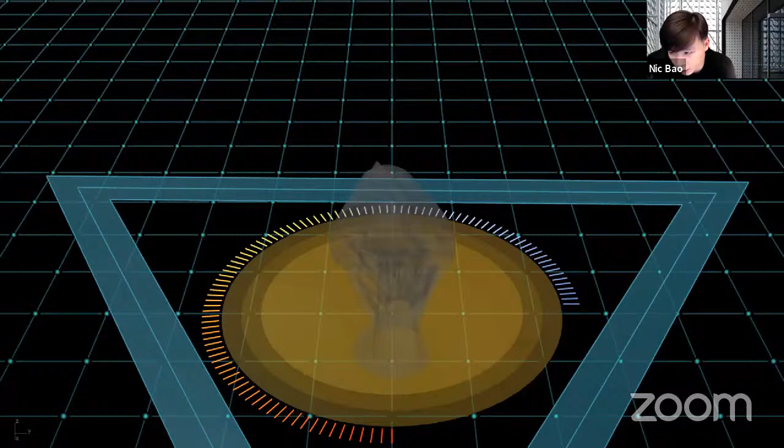So the girl designed high heel shoes and did the optimization for the high heel, creating tree-branch structures under the shoe. This is the cat tree, where students used Ameba to create the structural system of a cat tree. This group of students designed structural system components. This group of students optimized a chunk of the Shanghai Tower. And this is the bicycle frame optimization.

Currently we have several bicycle designs using Ameba, and they're more innovative. So this is the end of the video. This is the Chinese heritage building design by a student in 2019. And this one is from Digital Futures 2020 last year, where a group of students designed Eiffel Tower 4.0.

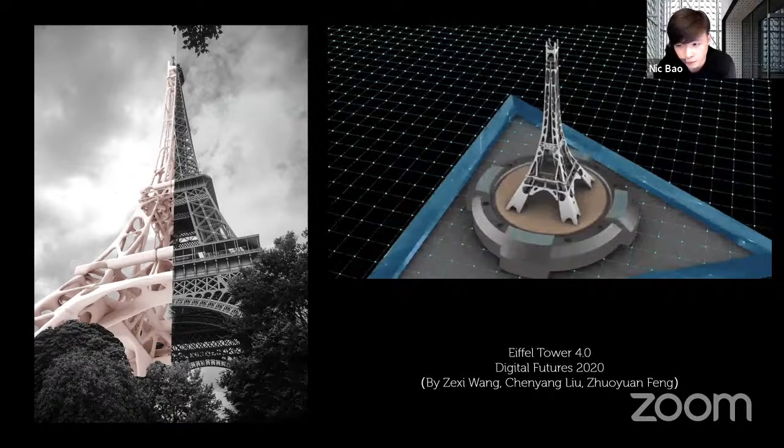And this is last year's workshop at the CAADRIA conference. Xinyan and I led the workshop and asked all the students to redesign the facade of the Sagrada Familia. And this is the spiral staircase optimization design in the same workshop.

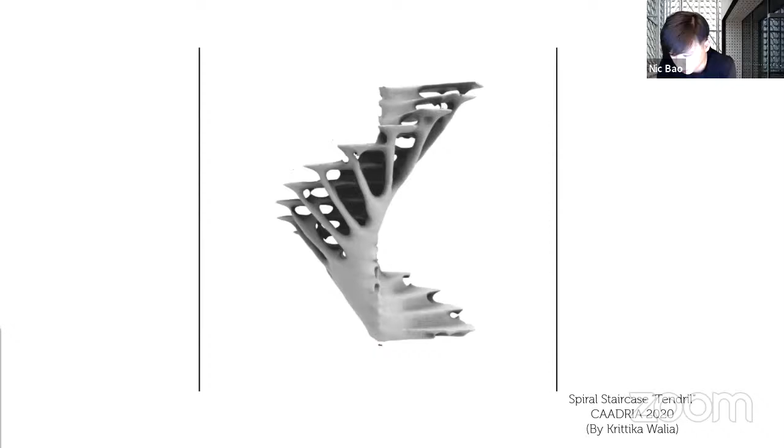So what is new? In my research in the past few years, I'm also working on integrating the topology optimization method with swarm intelligence. You can see the video here. The left side is the BESO method on a building, and the right side is the swarm intelligence designed by Roland Snooks. I'm developing with my team members a swarm BESO. We call it swarm BESO, based on the basic logic of BESO, integrating the FEA model and multi-agent behaviors.

So we called it swarm BESO, and currently we changed the name to MATO, which is multi-agent based topology optimization. So these are the basic rules: evolutionary optimization from the FEA and the strain energy density to modify element properties. So we give the multi-agent system a new behavior with the structure-based rules. So this is the basic agents' movement, and we're working on the Python platform.

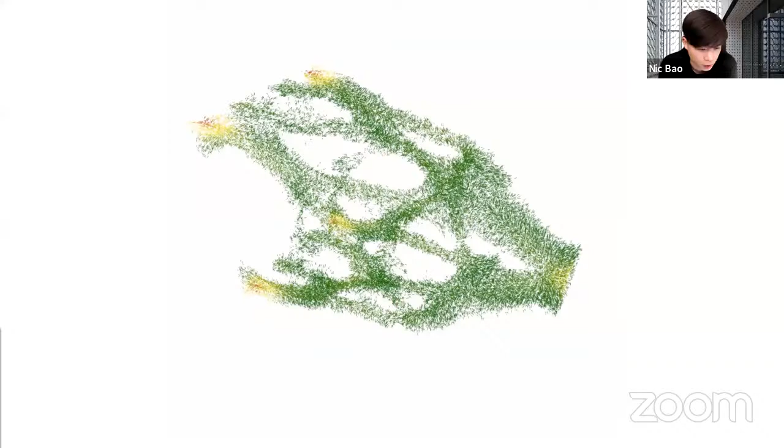So this is the very early results we tested. You can see the different performance using different parameters. So it's an agent-based topology optimization. This research is to explore a real-time structural behavior feedback loop in the process of designing intricate functional form through encoding BESO logic structural rules into a multi-agent algorithm. You can see each different step of the iteration. And this we tested on the bench system.

So our paper has been accepted and is going to be presented at the CAADRIA conference next week. Our future work will apply the new algorithm on the lattice staircase. So we just did some little tests, and this is future work this year.